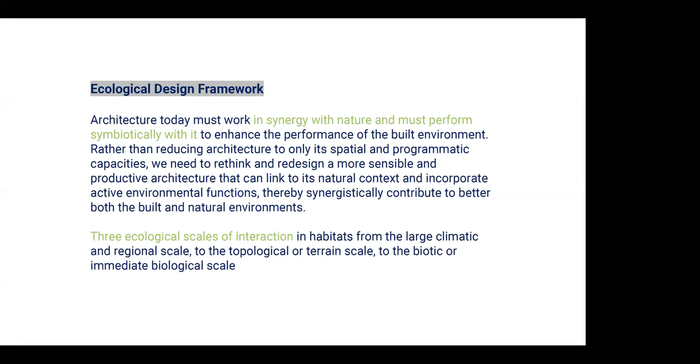So this was for us translated more towards the immediate environment or the habitat scale, and then to the biotic or the immediate biological scale, which for us translated towards the human level scale and the relationship with its community within the housing community development that we were working on.

Second, from the biosphere needs and synergies, we tried to recognize this biosphere of Jabal Moussa as a valuable zone that enables regional development and has the potential to integrate new programs, especially in its buffer areas. An important side note: this was the first time students were even exposed to the term biosphere, so most of them did not really know what it was about, and even most did not really know Jabal Moussa specifically.

So it was an opportunity for them to first understand the importance of biosphere reserves in sustaining both nature and life and the community around it, but also to visit Jabal Moussa, which they did. They spent some time there, even stayed overnight, and went around to the villages to talk to the people who are there.

Based on this, the idea was to incorporate new communal models for living and working close to these natural zones. We were thinking about Jabal Moussa especially as an area that is not extremely far, proximate enough to certain urban agglomerations. If we think about Jaltoun, Balloune, these types of neighborhoods that are quite condensed even though suburban, it can become a sort of halfway escape where people can choose to relocate and live there and work there.

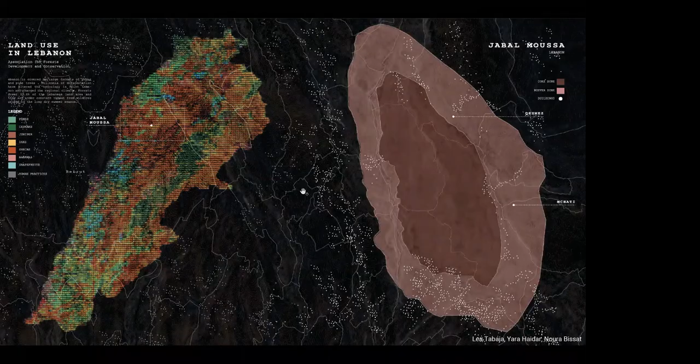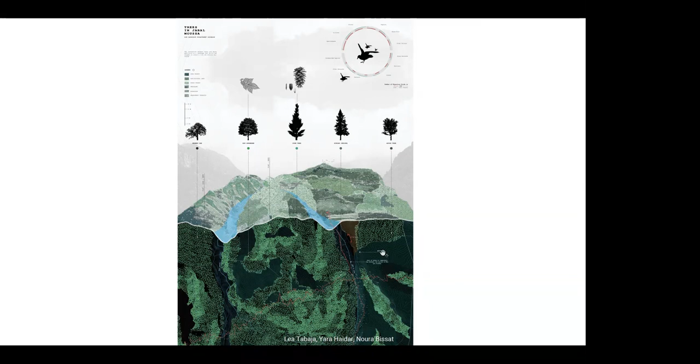Of course, this was all based on existing information and data that they were able to find, but reinterpreted through their own drawings to build more relationships between things that they see at the surface, things that they see in plan, and then the relationship with the towns. For example, here Mchati is over here.

So moving on to the next phase, I'm just checking the time and to make sure I'm moving in the right pace. The scale of the habitat.

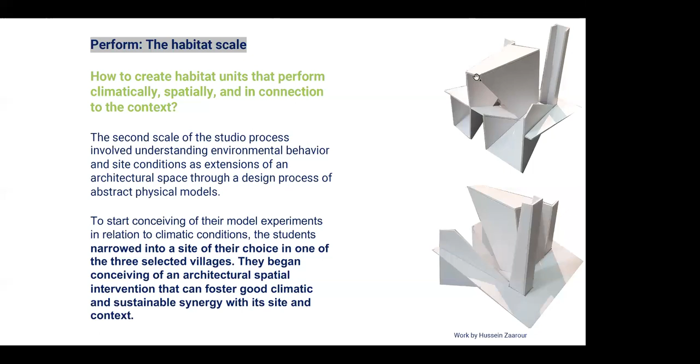So this is just one example. These are other examples that we can see also quickly, also based on wind and orientation, and trying to elaborate on how ventilation, for example, can be allowed while offering a non-standard type of space.

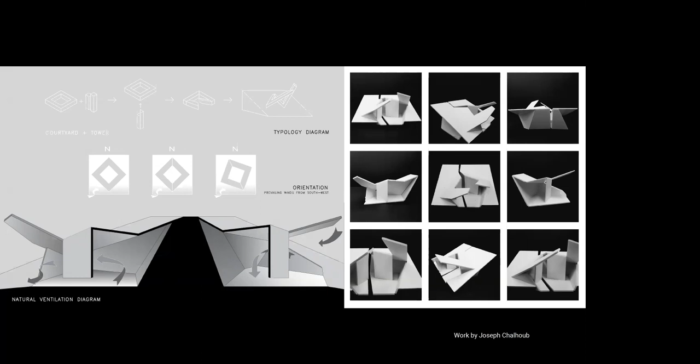So the idea was not to recreate just an architecture that's a block separate from its environment or its context, but that it can also blend with it and sit within the landscape, so that there's a blurring of these two boundaries together.

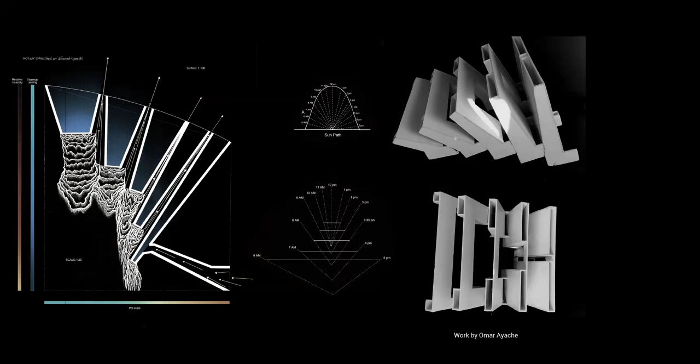This is another example of a student who was really interested in some cave structures he found in the natural rocks in Ehmej, and was thinking of how he can benefit from underground or subterranean spaces to have a varying thermal comfort level, from colder to hotter types of spaces, and how that relates to light and ventilation internally.

These previous models each developed into a proposal of a single habitat or a single housing unit. Then from that single housing unit, the students were asked to develop a communal housing strategy. So how do you bring this single unit into a multiplicity?

How do you create a combination and ensure that with that combination you have a proper relationship between outdoor and indoor, between the people living in that community, how they live together and work, or spend time together.

But more importantly, it was about proposing the potential program and user group of that community who would relocate to this vicinity of Jabal Moussa. So who are these people, and how are they related to the area? Students had to really propose something specific, not just say random people from anywhere can come and live here.

The proposed program's point was that it would serve as a link between these incoming inhabitants and the local area and its people, as a potential communal and sustainable space that links to the existing synergies and resources in the different towns.

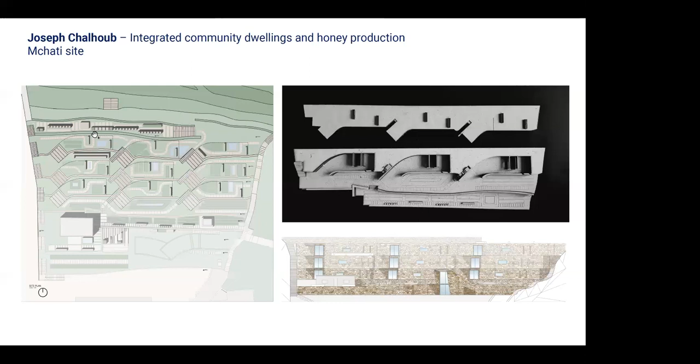So here is where the more process-oriented production of honey can occur, while the highest point, for example, would be right at the top, closer to the Biosphere Reserve. This is the scale of the dwelling, where you start to see the different dwellings.

In this image specifically they seem to be the same type, but in other moments on the site, he also had elements that were double height, so double floor for larger families, and single bedroom units for smaller families or individuals.

Each of these units, in addition to being open from the front, also had skylights and cross ventilation from the top, in addition to water connection. The idea was that there's always a collaboration between the different systems at hand - environmentally performative, but also considering water collection, agriculture, and landscape as part of this community's livelihood.

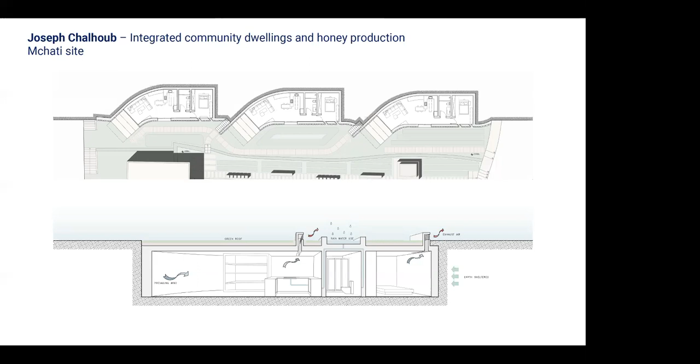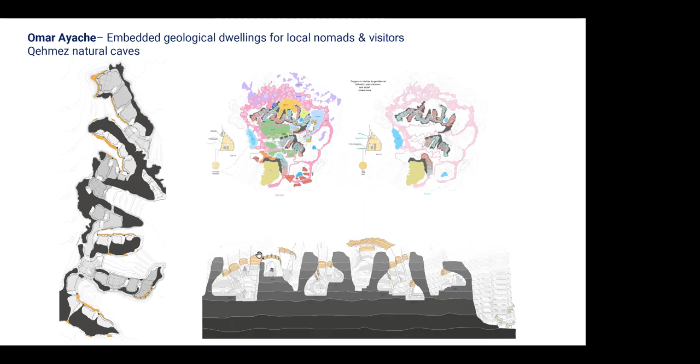What we're seeing here is the plan where certain spatial formations start to occur inside these caves, and in section you have different openings and varying levels of thermal comfort depending on the program. He maintained the living areas, where they spend the most time, as the warmer spaces, learning from materials shepherds use in their tents to create covers that form an enclosure when needed, in winter.

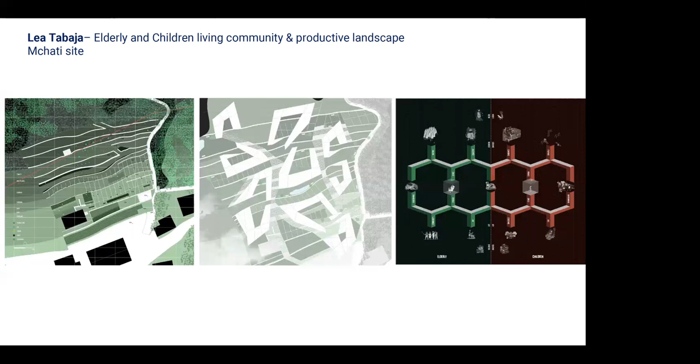This shows more of her explorations at that level, and how her project appears in section.

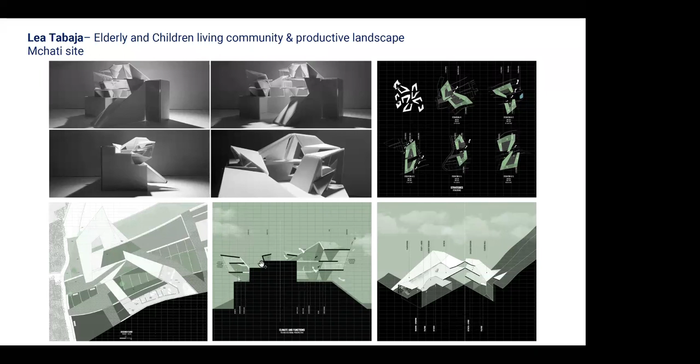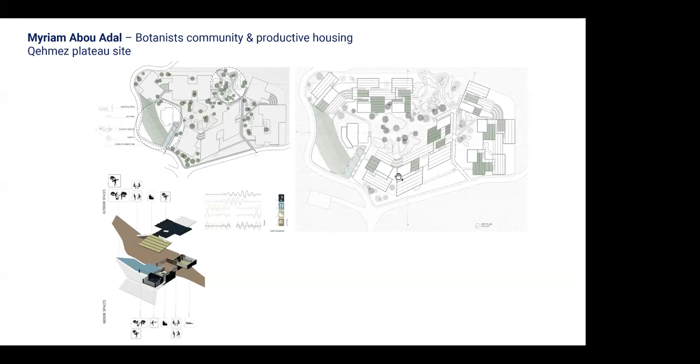She also thought about infrastructure, considering how water is collected throughout these different levels and how it can be reused, as well as protection from the southern, harsh sun, and so on.

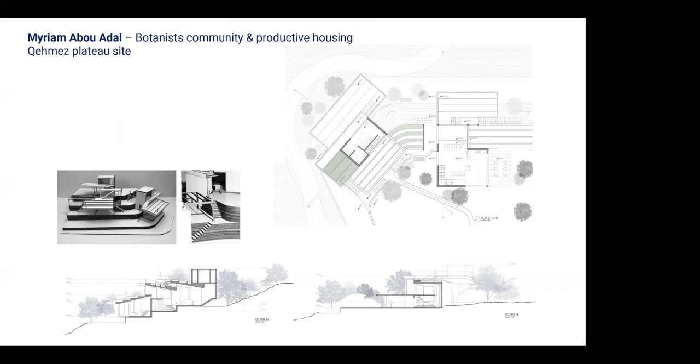I'm at the end of my presentation. Sorry, it's because of allergies—I tend to cough a lot sometimes. I'm just going to go to the last slide.

This is really the synthesis of the work I showed today. What we tried to do in that studio is bring both the research and the understanding of biosphere reserves to the heart of the architectural studio and discourse, positioning it as an essential subject students could and should engage with, in order to propose more holistic and sensitive integrations of architecture with the environment.

So the biosphere itself served as a model of reference, as an ecology that includes necessary synergies between people and the natural environment in all its encompassing richness, from the ground layers to the atmosphere. This was the model of reference for us, upon which we thought of these communal dwellings at another scale, that also have this synergy between production, living, landscape, and the environment at large. Architecture as such was seen and developed as a continuity of this ecosystem, as an inherent and synergistic space that engages with its surrounding and the community at large. That's it, thank you very much.

Thank you, Carla, for a very interesting work by the students. It's interesting to see how the Biosphere Reserve becomes the basis on which they start designing and finding solutions and opportunities. The floor is open for questions.